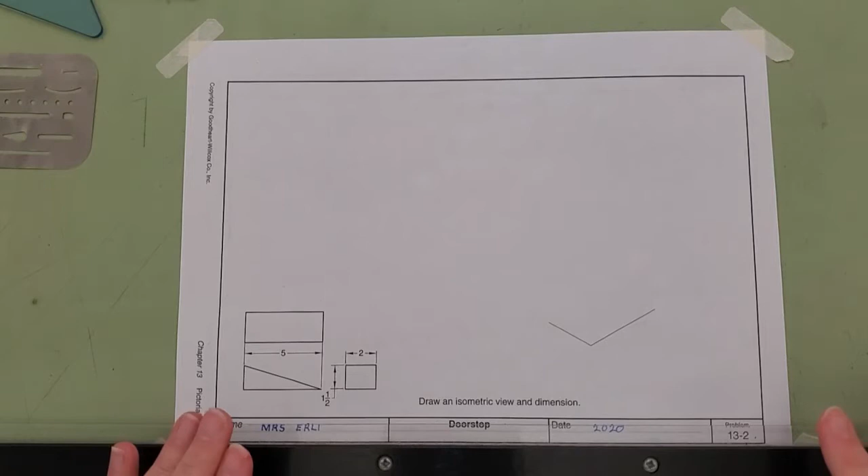For exercise 13-2, we're going to be drawing essentially a doorstop. It's a wedge, okay? And we're going to keep the views the same, top, front, and right side, okay? So once again, our best friend for this drawing is going to be our 30, 60, 90 triangle, and they gave us our starting point this time as well.

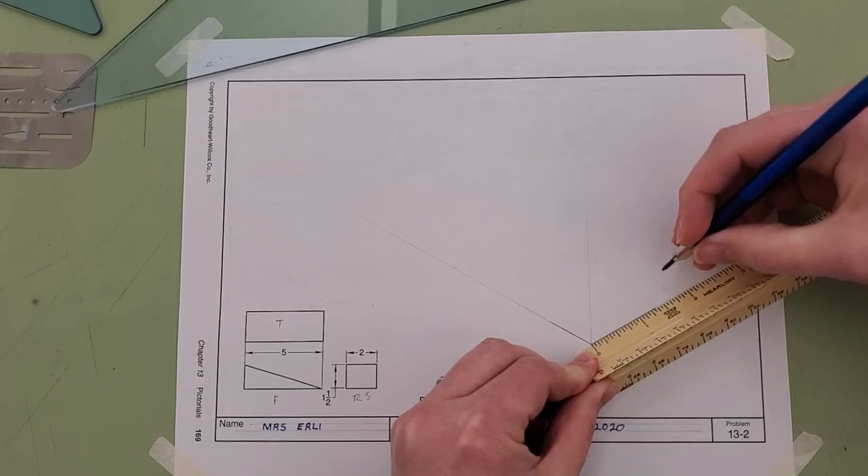We're always going to start off with our glass box. So this is going to be, you know, the size of what your product has to stay within. Okay, it doesn't matter that this is a nice wedge that's sloping down this way. I want to draw the entire boundaries of my glass box just to be sure that I have everything in the drawing space, because it's easier to erase a glass box and move it than it is to erase the entire object once you have it drawn and you find out it doesn't fit.

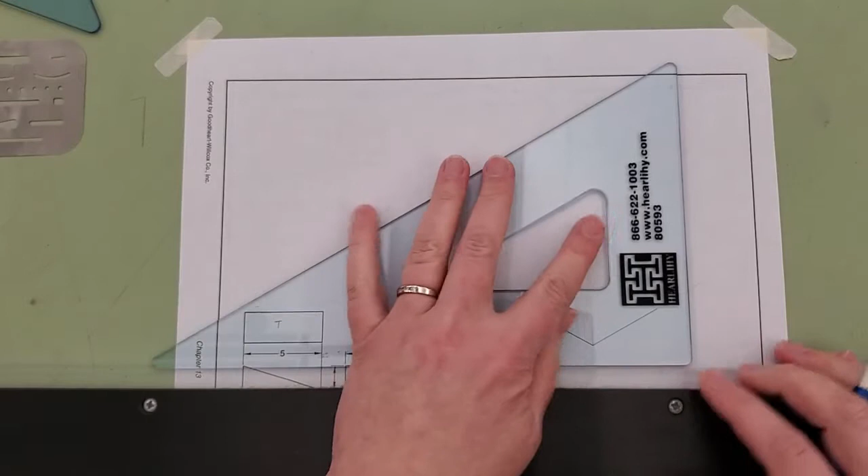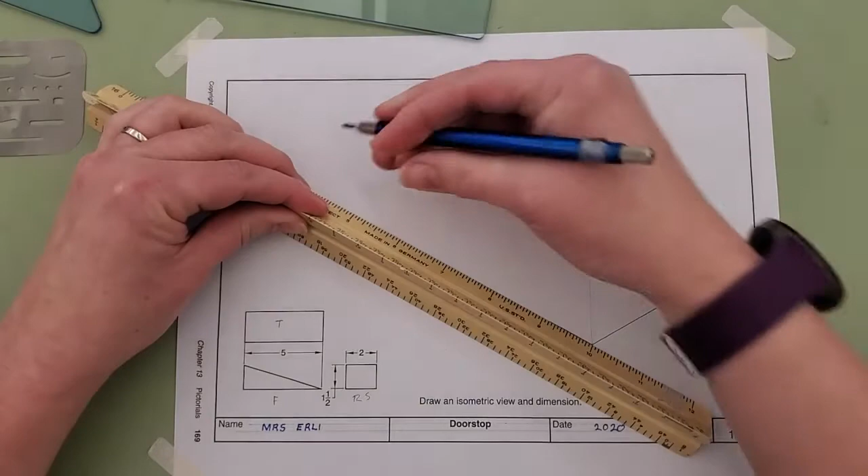So the first dimension I did was the depth of 2 inches from front to the back of the object. Okay, so I measured that out and I'm going to project that point up vertically. Now from right to left is going to be 5 inches. So I'm going to line that up. Count 5 inches over. Tiny dot. And extend that up.

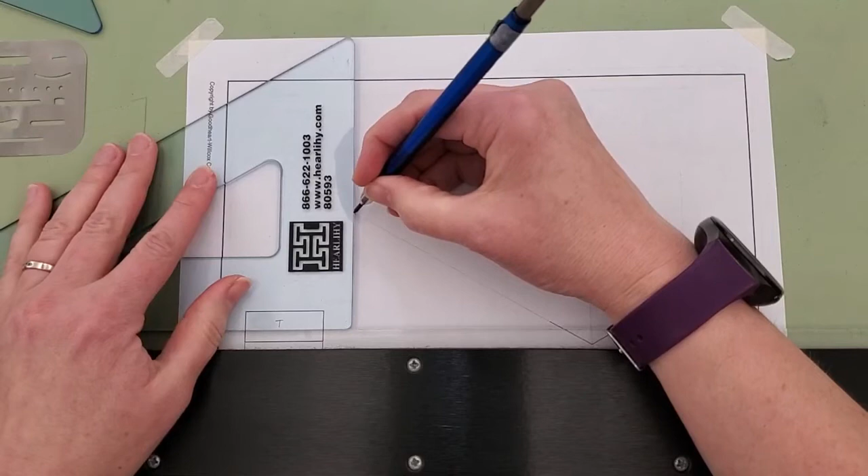Okay, and then my total height is 1.5 inches. So I'm going to measure up 1 1/2. And extend that left and right. And then at the intersecting points, I'm going to extend it over to help me finish creating my glass box. If I measured carefully and I kept my 30-degree angles nice and even, then I shouldn't have to remeasure anything for this.

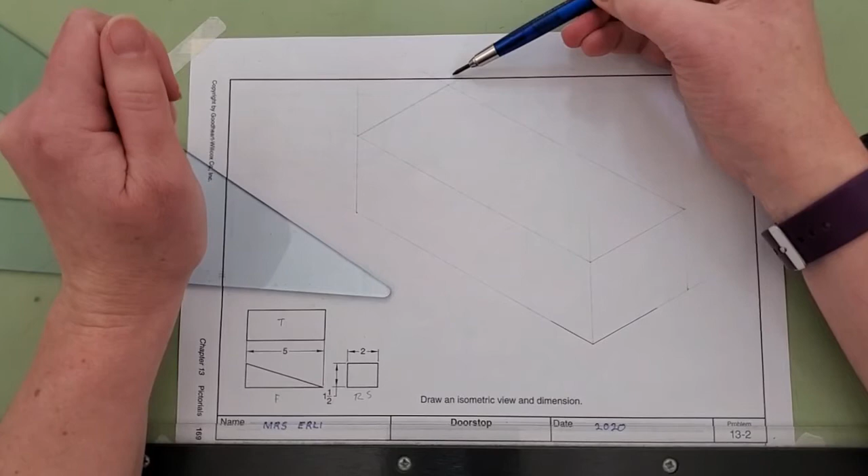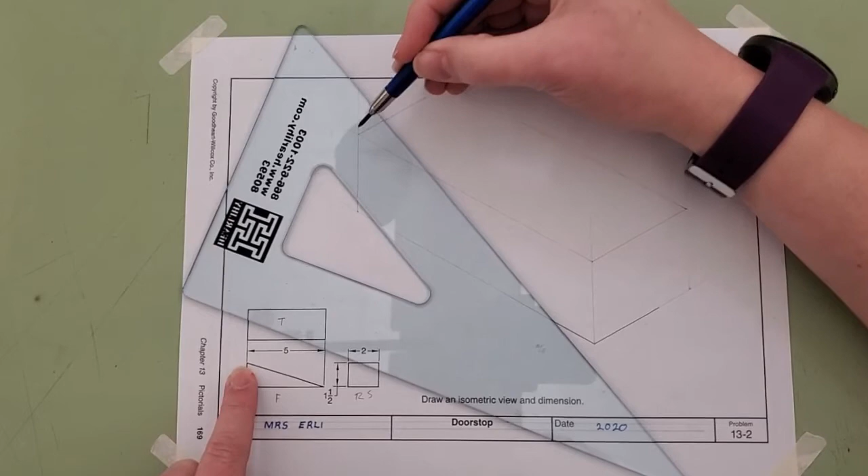Okay, and as you can see, our glass box is just a little bit away from that top border line, and that's fine. It just can't touch or go beyond the border. Everything has to stay in our drawing space. So now the next thing coming is, how do we draw this angle? What is that angle? Honestly, I don't know, and I really don't need to care, because it says it starts at the topmost point and it continues in a straight line down to the very bottom.

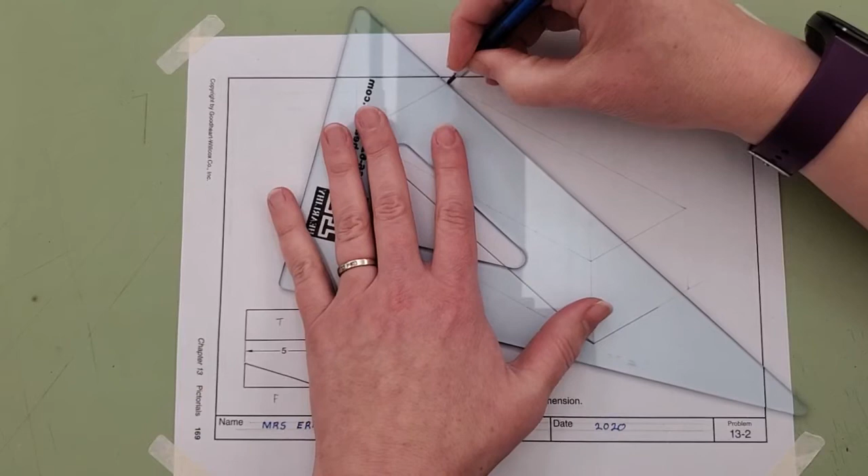So I'm going to set up my triangle, my straight edge, and I'm going to draw that line. I'm going to do the same thing in the back because it's just a wedge. It's a doorstop. So I'm going to set my pencil back here. I'm going to turn my triangle until it comes to that angle. There we go. And now all I have to do is darken in my construction lines for the rest of that wedge.

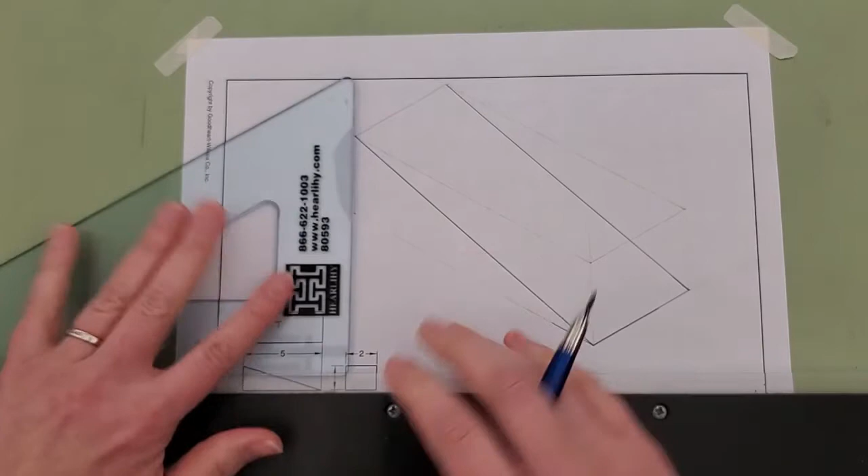Oops, I almost forgot this top back part. Don't want to forget that.

Oh, here goes my desk moving on me again.

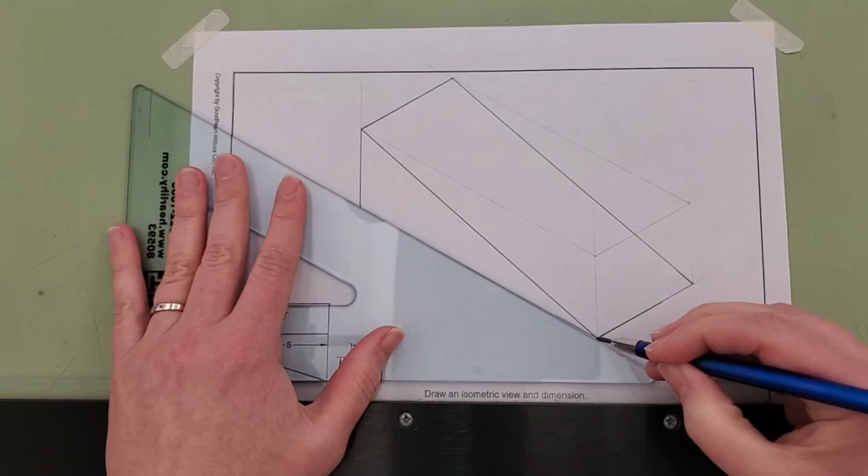Okay, and there we go. I'm going to double check to make sure I don't need to clean up any endpoints, make sure my name's on it, and turn it in.